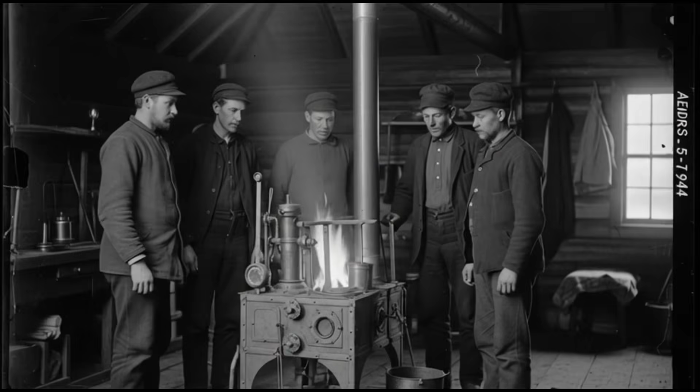The clay drainage tiles were stacked in Anders Lindstrom's barn like a puzzle that made no sense to anyone who saw them. 48 sections of terracotta pipe, each one 3 feet long and 8 inches in diameter. They'd been hauled from the drainage tile factory in Red Wing, Minnesota, at considerable expense.

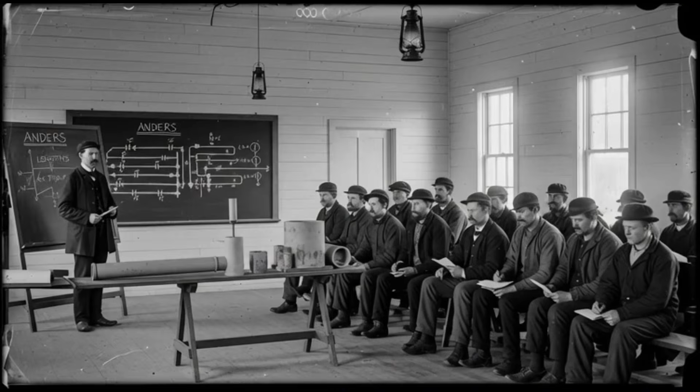Anders had spent 2 months' wages on them, and now, according to every person who'd seen his plans, he was going to use them to build a heater that would almost certainly explode and burn down his house. It was October 1894, and the Swedish immigrant had been explaining his idea to skeptical neighbors for weeks.

He was going to run the clay pipes through his cabin walls in a continuous serpentine path. He'd fire a small combustion chamber at one end. The hot gases would travel through the entire length of pipe, 48 sections connected end to end, 144 feet of clay pipe total, before finally exiting through a chimney. The heat from the hot gases would warm the clay. The clay would radiate that warmth into his home.

It was, he insisted, a principle as old as Rome. The hypocaust heating system used by the ancient Romans worked on the same concept. Hot air traveling through channels under floors and inside walls. The masonry absorbing and radiating heat. Efficient, comfortable, and safe. His neighbors thought he'd lost his mind. Martin Olsson, whose homestead was closest to Anders, made his opinion clear.

Clay pipes aren't meant for fire, Anders. They're meant for drainage, water, not fire. You heat them up, they'll crack. Or worse, they'll explode. You'll have pieces of burning clay flying through your house. It's dangerous. It's foolish. Just build a regular stove like everyone else.

Anders was patient in his response, though he'd given it many times. Clay can handle heat. That's why they make firebricks from clay. These pipes are thick, good quality. They're made to handle pressure from earth and water. They can handle heat. But the fire will be inside them, Martin argued. That's different from earth pressure.

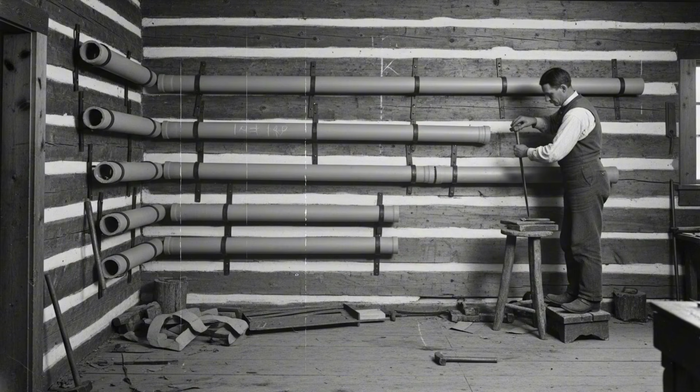On November 5, 1894, Anders was ready for the first test. He'd invited several neighbors to witness, partly to document success and partly to have help nearby if something did go wrong. Martin Olsson was there. So were Jakob Svensson, Peter Andersson, and Henrik Karlsson. 5 men total, standing in Anders' cabin, looking at the maze of clay pipes with expressions ranging from curiosity to dread. "If this goes badly," Martin said, "we're all running. Fast." Anders nodded. "If it goes badly, I'll be running fastest of all. But it won't go badly."

He'd prepared his first fire carefully. Small pieces of very dry wood, arranged to allow maximum airflow. He wanted a hot, clean burn, not a smoldering fire that would produce creosote and soot. He lit the kindling. It caught immediately. Within minutes, a good fire was established in the small combustion chamber. Anders adjusted the air vents, tuning the burn. He wanted complete combustion, the fire burning efficiently with minimum smoke. He achieved it quickly. The flames were clear and hot. Very little smoke emerged from the chimney. The hot gases were traveling through the pipe system.

The watchers stood tense, waiting for something to happen, for a crack, for an explosion, for disaster. Nothing happened. The fire burned. The pipes began warming up. Anders walked along the pipe runs, carefully touching each section to monitor the temperature. "It's working exactly as designed," he said. "The gases are hottest near the combustion chamber. By the time they reach the chimney, they've given up most of their heat to the clay. Feel this." He gestured to a pipe section near the combustion chamber.

Martin cautiously reached out and touched it. It was warm, but not dangerously hot. Warm enough that you wouldn't want to leave your hand there, but not hot enough to burn on brief contact. "About 130 degrees," Anders estimated. "The gases inside are probably 300 to 400 degrees at this point, but the clay insulates. The outside surface is much cooler."

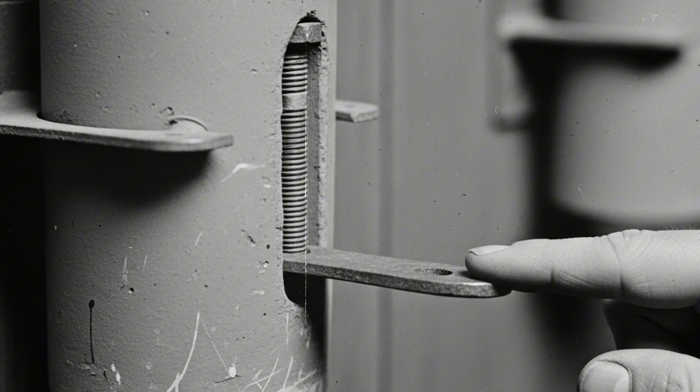People across Minnesota were in crisis. Standard heating systems struggled to keep up. Wood stoves and fireplaces had to be fed constantly. Families burned furniture when firewood ran low. Livestock froze in barns. Buildings suffered damage from the extreme cold and snow load. It was a disaster, and it lasted 12 days. From December 12th through December 23rd, the temperature never rose above zero. The snow fell almost continuously. The wind never stopped. It was the longest sustained cold spell Minnesota had experienced since record-keeping began.

Anders Lindstrom's clay pipe heater ran continuously throughout the entire 12-day blizzard. He fired it 3 times per day during the worst cold. Morning, mid-afternoon, and evening. Each firing lasted about 90 minutes to 2 hours. Total burn time per day, 5 to 6 hours. The rest of the time, 18 to 19 hours per day, the clay pipes radiated stored heat. The cabin temperature never dropped below 60 degrees. Even at the coldest point, when outside temperatures hit -40 degrees, Anders's cabin stayed comfortable. The clay pipe network, with its massive thermal mass, absorbed heat during the firing periods and released it slowly during the non-firing periods. It was like a battery, charged 3 times a day and slowly discharged in between.

The wood consumption was remarkably low. Anders estimated he was using about 1/3 of a cord of wood per day during the extreme cold. His neighbors were burning 1 to 2 cords per day and still struggling to stay warm. The efficiency difference was enormous. But the most impressive aspect was the safety. People had predicted the clay pipes would crack under thermal stress, especially during rapid heating and cooling cycles. They had predicted that the expansion and contraction from repeated firing would cause joint failures. They had predicted disaster. None of it happened. The pipes remained intact. The joints remained sealed. The system operated flawlessly for 12 days of continuous use in the most extreme conditions imaginable.

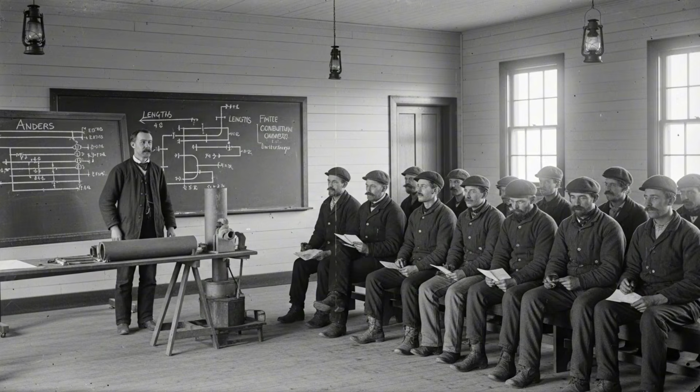Some researchers studying alternative heating methods rediscovered the clay pipe heater principle. They called it a thermal mass accumulator or heat storage system. They didn't know about Anders Lindstrom or the Minnesota homesteaders who'd built dozens of these systems 80 years earlier. They thought they were innovating. They were actually rediscovering. This pattern of forgetting and rediscovering is common with vernacular technologies. The knowledge exists in specific communities, serves them well, but never gets widely documented or formally taught. When the generation that practiced the technology dies, the knowledge dies with them unless someone makes an effort to preserve it.

In recent years, there's been renewed interest in thermal mass heating as part of the broader sustainable building movement. Rocket mass heaters, which use a similar principle of extracting heat from combustion gases and storing it in masonry mass, have become popular in some alternative building communities. These modern systems typically use more sophisticated insulation and combustion chamber designs, but the fundamental concept is the same as Anders's clay pipe heater. Burn a hot, clean fire. Extract the heat into thermal mass. Let the mass radiate the heat slowly. The efficiency and comfort benefits are identical.

Some modern builders have even recreated clay pipe heaters specifically, using either ceramic flue pipes or, in a few cases, actual clay drainage tiles like Anders used. The results confirm what Anders knew in 1894. The system works. It's efficient, it's safe, and it's remarkably durable.

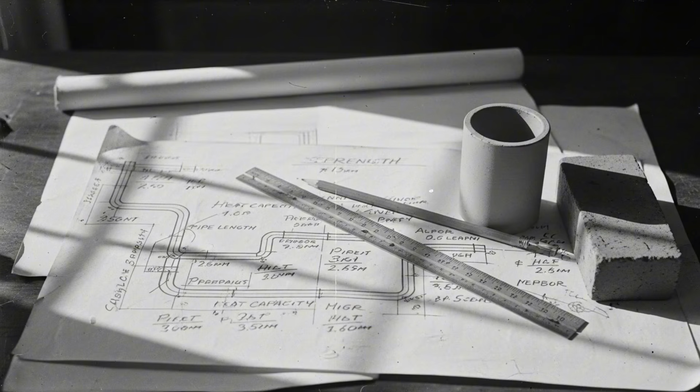This suggests that preservation of vernacular knowledge is important even when that knowledge doesn't seem immediately relevant. We don't know what future conditions will require. We don't know what problems we'll face decades or centuries from now. Maintaining diverse knowledge bases, including traditional and vernacular techniques, provides options when we need them.

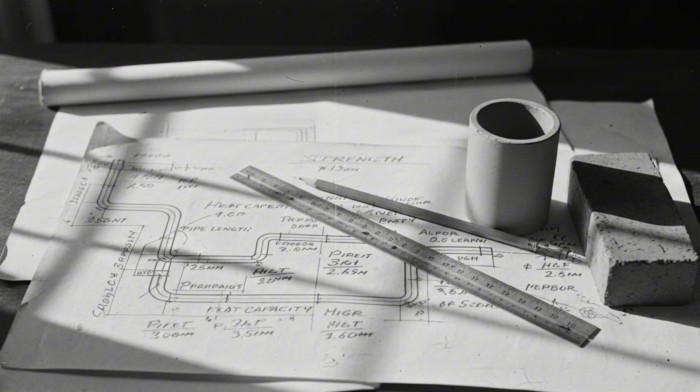Anders's clay pipe heater also demonstrates the importance of understanding principles rather than just copying methods. Anders didn't just copy a Swedish design, he understood why it worked. He understood heat transfer, thermal mass, combustion efficiency. That understanding allowed him to adapt the concept using different materials in a different context.

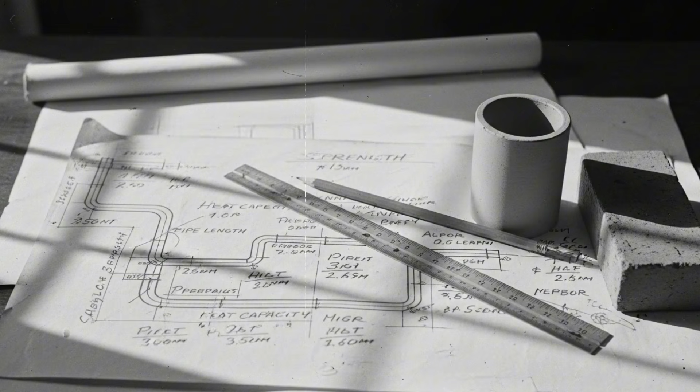If he just tried to copy a specific Swedish design without understanding the principles, he probably would have failed. Understanding why things work is more valuable than knowing that they work.

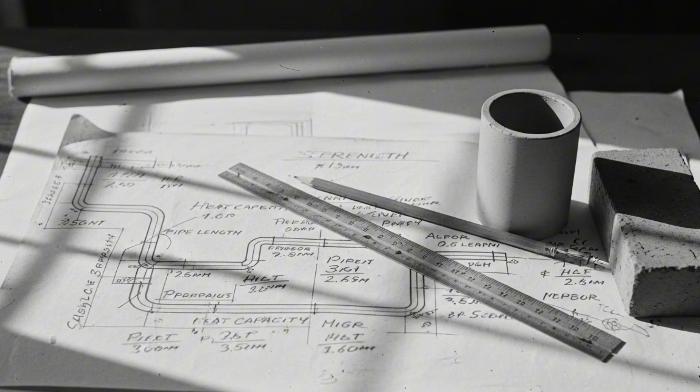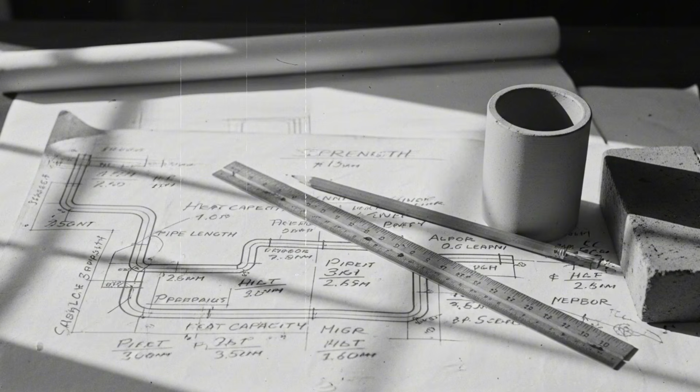The economic impact of the clay pipe heaters on the families who adopted them was substantial. Reducing firewood consumption by 50 to 75% freed up enormous amounts of time and labor. A family that had been cutting and hauling 8 to 10 cords of wood per winter now needed only 2 to 3 cords. That's weeks of saved labor, time that could be used for other productive activities or simply for rest. The cost savings in terms of labor translated directly into improved quality of life. Less exhaustion, more time with family, more time for education, crafts, or other pursuits.

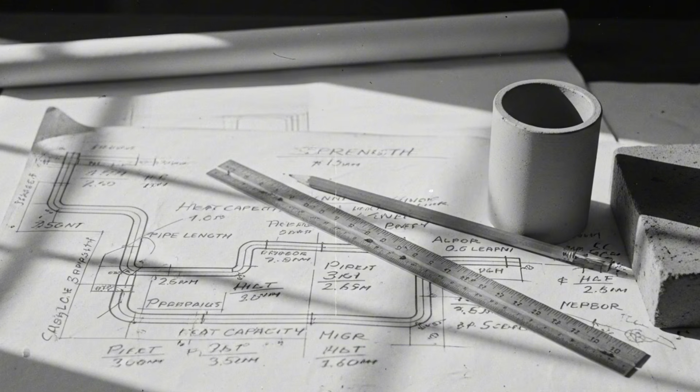The comfort level was also economically valuable in a less direct way. A warmer, more comfortable home meant better health. Fewer respiratory infections, less stress on the body from constant cold. For children and elderly family members in particular, the consistent warmth could be the difference between health and illness, between thriving and merely surviving. These benefits are difficult to quantify in dollar terms, but they were real and significant.

The safety record of the clay pipe heaters is worth emphasizing. Over a period of more than 50 years, with dozens of systems in operation, there were no fires, no injuries, no failures that resulted in property damage or harm to people. This is remarkable, given that these were experimental systems built by homesteaders without formal engineering training. The success rate was 100% because the fundamental design was sound. Clay pipes could handle the application. The engineering principles were valid. The concerns about explosion and fire, while emotionally compelling, were not supported by the physics of the situation.

This perfect safety record contrasts sharply with the risks associated with conventional wood stoves of the period. Stove fires were common. Chimneys caught fire. Stoves cracked and leaked carbon monoxide. Burns from touching hot stove surfaces were routine. The clay pipe heater, with its lower surface temperatures and enclosed combustion system, was actually safer than the accepted alternative. But people feared it because it was unfamiliar. They accepted the known risks of stoves because those risks were familiar and understood. The unknown risks of a new technology seemed more dangerous even when they weren't. This is human psychology, not rational risk assessment.

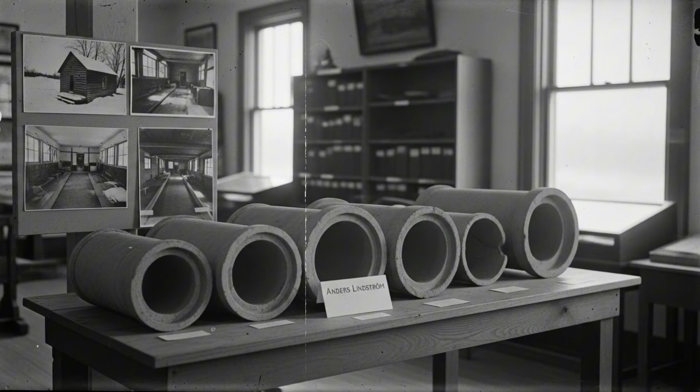Anders Lindström's legacy is modest but meaningful. He's not famous. There are no monuments to him. His name appears in a few historical records and newspaper articles, but he's not remembered as a great inventor or innovator. Yet he had a real impact. He brought knowledge from one context to another and adapted it successfully. He shared that knowledge freely, helping dozens of families heat their homes more efficiently. He demonstrated that unconventional approaches could work if they were based on sound principles. And he left behind a technology that, while not widely adopted, proved the value of thermal mass heating and contributed to the broader knowledge base of efficient heating systems.

In an age where we celebrate disruptive innovation and transformative technologies, Anders's story reminds us that most progress is incremental and local. It's about taking what works in one place and making it work in another. It's about sharing knowledge within communities. It's about the patient work of building, testing, refining, and teaching. It's not dramatic. It's not flashy. But it's how most real improvement happens.

Everyone said his clay pipe heater would explode. They were certain that heating drainage tiles with fire was dangerous and foolish. They predicted disaster. They mocked him for wasting money and time on a system that couldn't possibly work. Then it worked for 12 days straight during the worst blizzard in Minnesota history. Then it kept working for decades. Then it proved that the skeptics were wrong about everything. The clay pipes didn't explode. They didn't crack. They didn't fail. They stored heat and radiated warmth just as Anders had said they would. The ancient principle of thermal mass heating, implemented with modern materials, created a system that outperformed everything else available. Anders Lindström was right. The skeptics were wrong.

And the lesson is simple. Don't dismiss ideas just because they seem strange. Don't assume failure just because something is unfamiliar. Understand the principles, look at the engineering, test carefully, and be willing to admit when you're wrong. Anders's neighbors did that. They admitted error. They learned from him. They adopted the technology themselves. That's how progress happens. Not through stubbornness and dogma, but through openness and evidence.